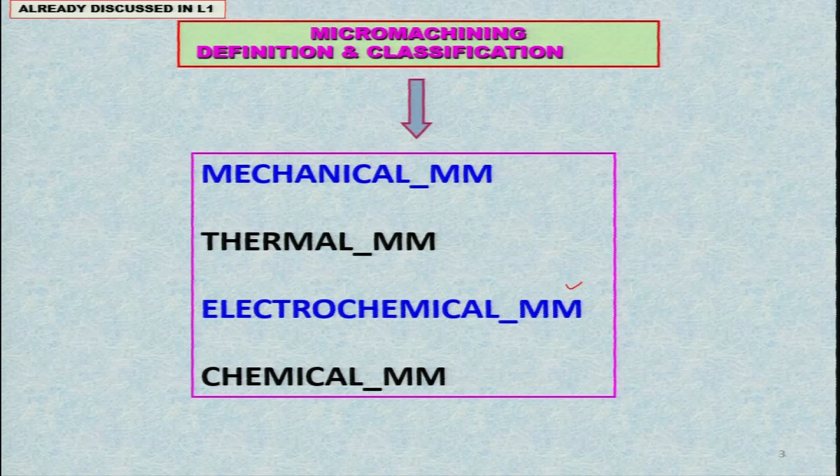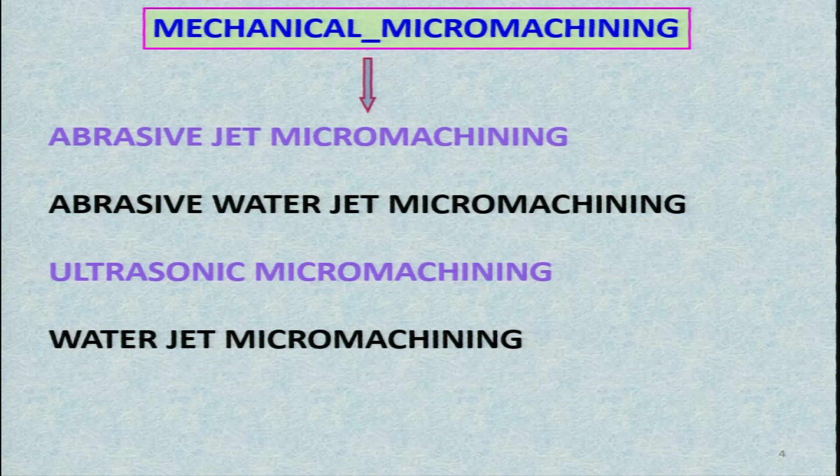If you recollect, we further classified mechanical type of micromachining processes as abrasive jet micromachining, abrasive water jet micromachining, ultrasonic micromachining and water jet micromachining processes. These are the advanced mechanical micromachining processes.

Now, traditional micromachining processes are given again here as micro turning, micro milling, micro drilling, etc. And then these are the total advanced micromachining processes, which includes thermal, mechanical, electrochemical and chemical type.

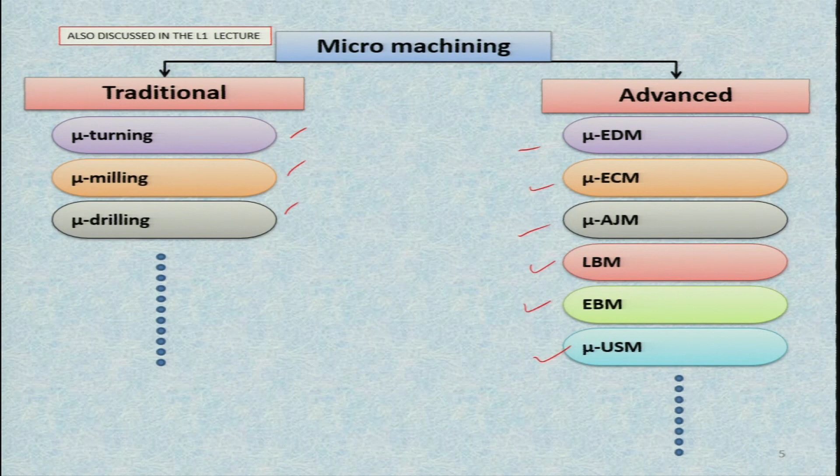I just repeat them as micro EDM, micro ECM, micro AJM, micro LBM or LBM as such, and micro EBM, and micro ultrasonic machining and so on. There are a large number of advanced micromachining processes. Some of them we will discuss later on in detail.

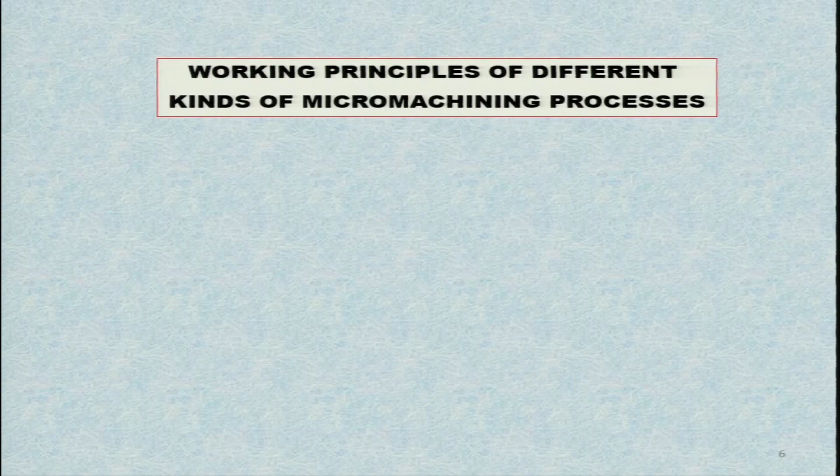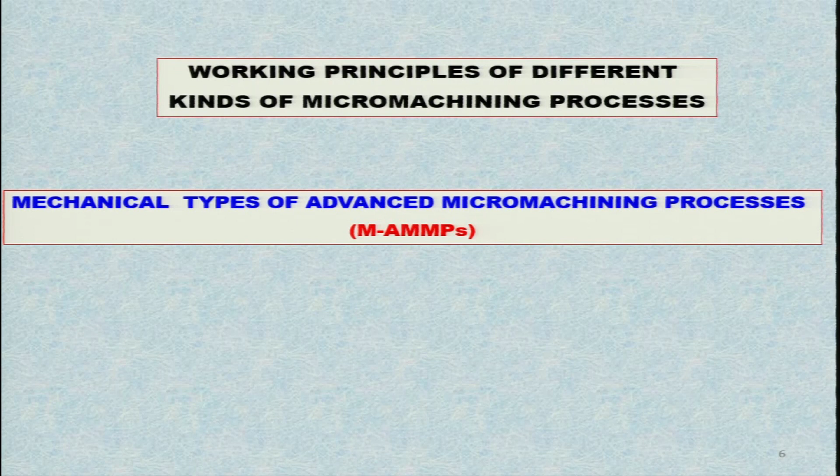Now, in this lecture, I am going to talk about the working principles of different kinds of micromachining processes overall, which includes all three types: mechanical, thermal, and electrochemical and chemical type. First we will discuss mechanical types of advanced micromachining processes, especially the working principle and some applications. Now, principle of advanced mechanical micromachining processes.

What is the mechanism of working of these processes? I will take them up one by one. As you can see here, this is the schematic diagram of the setup for abrasive water jet machining process.

You can clearly see here there is an inlet for the water coming in. It comes at very high velocity, we will discuss it later, and then there is a jewel through which it is coming out, and from this particular end, abrasives are being fed into the jet of water over here, and this is known as the mixing tube.

In this mixing tube, water and abrasive particles get mixed up, and this moves downward, and here is the jet coming out of the mixing tube. This jet consists of water as well as very fine abrasive particles, which may be of micro or nano size, and the velocity of these abrasive particles is as high as 800 to 900 meters per second.

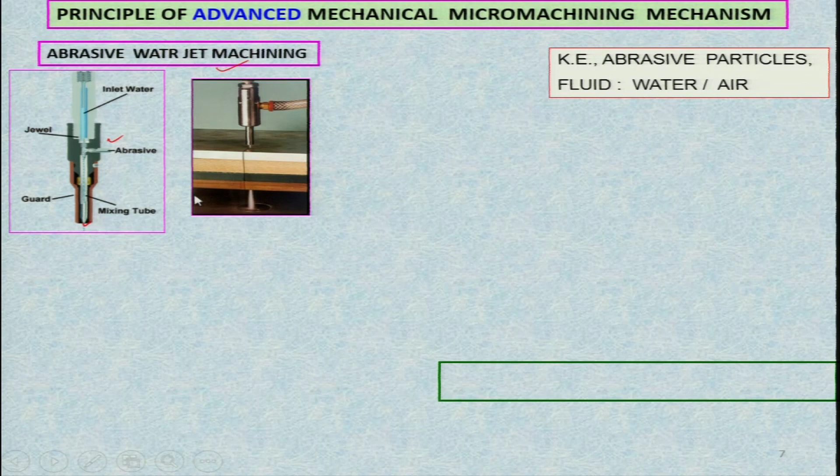So you can calculate the kinetic energy of each particle moving at such a high velocity. Now, this is the real life application of abrasive water jet cutting. You can see the jet coming from there, cutting the plate being cut over here, and here is the jet coming out after cutting this particular workpiece or plate, clearly visible over here.

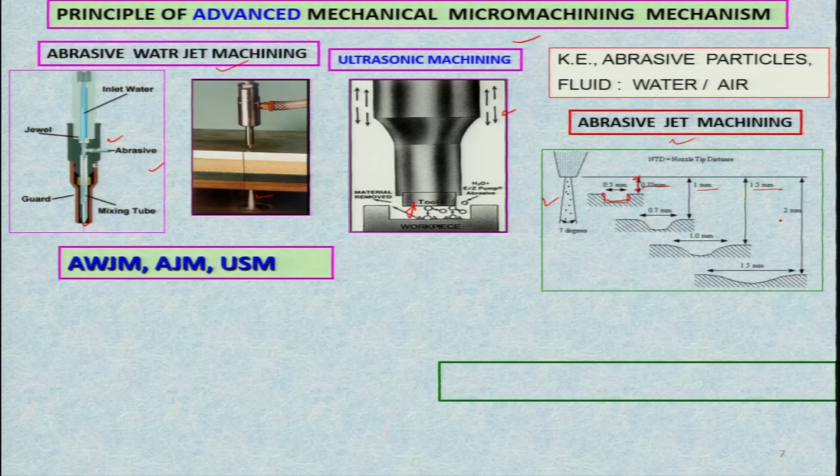This cavity size and shape depends upon the gap maintained between the bottom tip of the nozzle and the surface being machined. As you can see here, this is the initial gap between the bottom of the nozzle and the top surface of the workpiece. After machining, this is the shape produced. Depending upon this gap, the features of the cavity being formed change. In these different cases, the size or width of the cavity continuously increases as you increase the gap from 0.75 millimeter to 1 millimeter to 1.5 millimeter and 2 millimeter. This also decides the accuracy you are going to get.

Now, the question is how material is removed in these three mechanical types of advanced micro machining methods. We have two kinds of material: ductile material and brittle material. The mechanism of material removal in both these materials is different, regardless of whether it is abrasive water jet machining, ultrasonic machining, or abrasive jet machining.

You can see here in this figure, if the abrasive particle hits the workpiece surface at a certain angle, not 90 degrees but less than 90 degrees, and the workpiece material is ductile, then two forces are acting. One is the normal force, Fy, responsible for the penetration of the abrasive particle inside the workpiece, and there is another force, Fx, responsible for removal of material in the form of micro nano chips. It is the shearing force which shears the workpiece material and removes the chip in the form of small materials from the workpiece.

If it is a brittle material, the mechanism is slightly different. Here, as the abrasive particle hits the workpiece, being a brittle material, initially micro cracks initiate and spread all over the affected area. You have lateral cracks and a little bit of plastic zone, and the cracks keep expanding, and finally the material is removed in the form of micro nano chips from the workpiece. So, the two mechanisms, one for ductile material and another for brittle material, are quite different from each other.

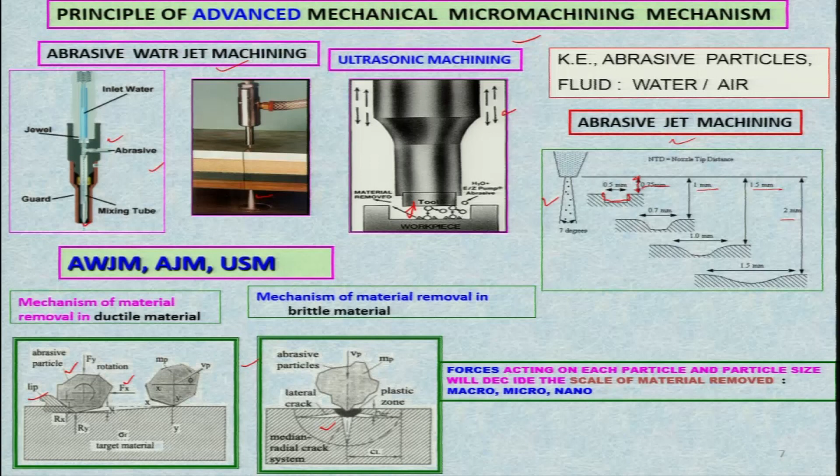Now let us discuss a bit more detail of these processes, that is, the abrasive jet machining process. As you can see here, this is the abrasive jet machining process, this is the nozzle, and different kinds of features are being created on the plate with the help of this process. You can see this hole is created, and different features are being created with this particular process.

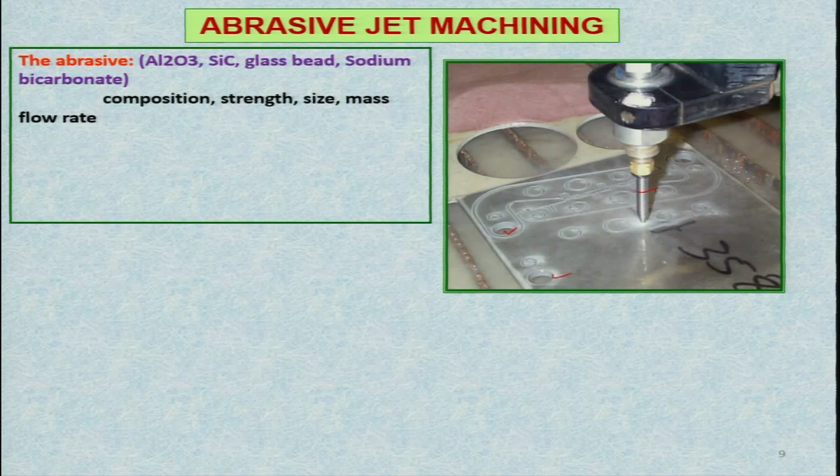The abrasives normally used are alumina (Al2O3), silicon carbide, glass beads, and sodium bicarbonate. Which abrasive to use depends on which workpiece material you are going to machine. The abrasive particle hardness should always be much greater than the workpiece material hardness, which makes a difference in the accuracy and material removal rate you get. So composition, strength, size, mass flow rate, etc. of the abrasive particle decides the process performance.

As far as the carrier is concerned, in abrasive water jet cutting, as I mentioned earlier, you use water as the carrier. But in abrasive jet machining, you normally use air, nitrogen, or CO2 gas as the carrier.

Their composition, pressure and velocity also affect the performance of the process, because pressure or the velocity of each abrasive particle will decide kinetic energy, and kinetic energy will decide how deep it can penetrate inside the workpiece and remove the material. In case of ultrasonic machining, it is the pressure with which the horn or the tool is hitting the abrasive particles, which will decide the kinetic energy again of that particular particle and the material removal rate.

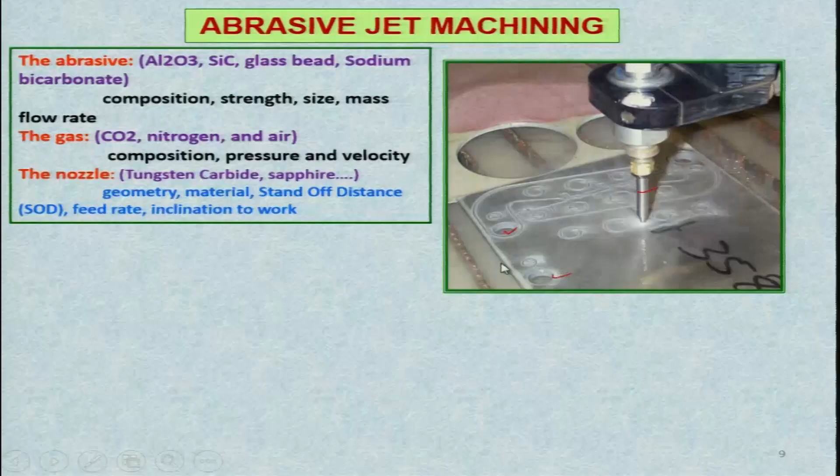Now, stand-off distance, as I have mentioned to you earlier, is the distance between the bottom of the nozzle and the surface of the workpiece which is being machined. And as we have seen in case of AJM, I have told you and shown you, it has a big effect on the shape and size of the cavity being machined.

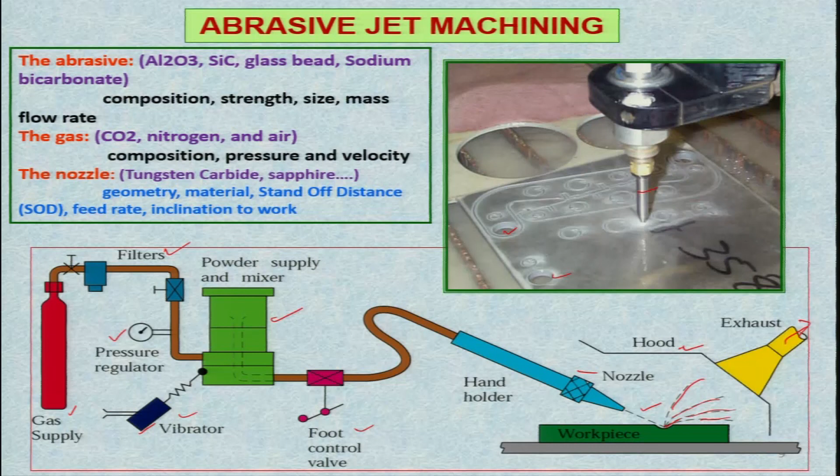And after hitting the workpiece surface, these abrasive particles bounce back and go away from the cavity being machined. It does not go and hit the other machines or other persons working over there. You have the hood over here, so that it will stop them, and whatever air or gas you want to exhaust outside the machining room or machining chamber, this will go out from here.

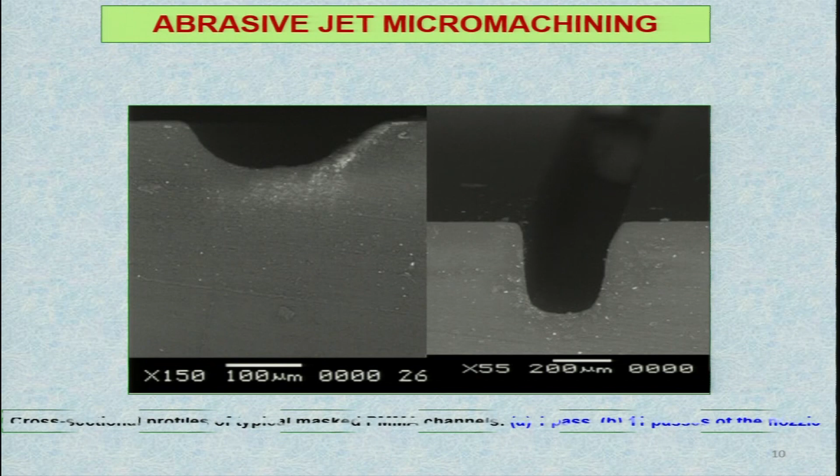Now, you have the abrasive jet micro machining applications. As you can clearly see here, the cross sectional view of the machined surface, cavity over here. This is the shape and size of the cavity after one pass of machining.

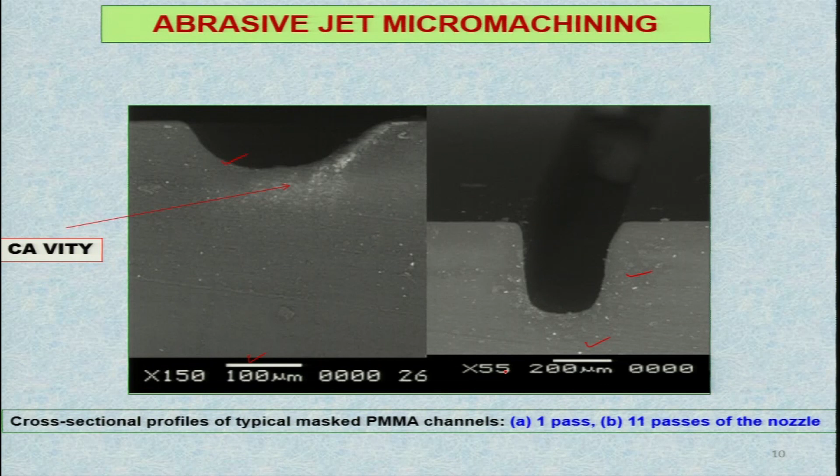Now, if we continue, you can see the magnification here, this is 150 times magnification over here, and if you see this, it is the cavity you are getting after 11 passes, and you can clearly see the difference between the two. The magnification over here is 200 micrometer, this particular length. As you can see, it is 55 times, it is 150 times.

Now, another process which can be used for micro cutting or cutting both is the water jet machining process or water jet micro machining process. The principle remains the same. Here the kinetic energy of water is used to remove the material. Definitely it is not used for cutting very hard material.

Initially water jet machining was developed for cutting in the coal mines in Japan, because so many accidents were taking place by fire in the coal mines, and keeping that in view, water jet cutting process was developed, so that fire does not take place in the coal mines.

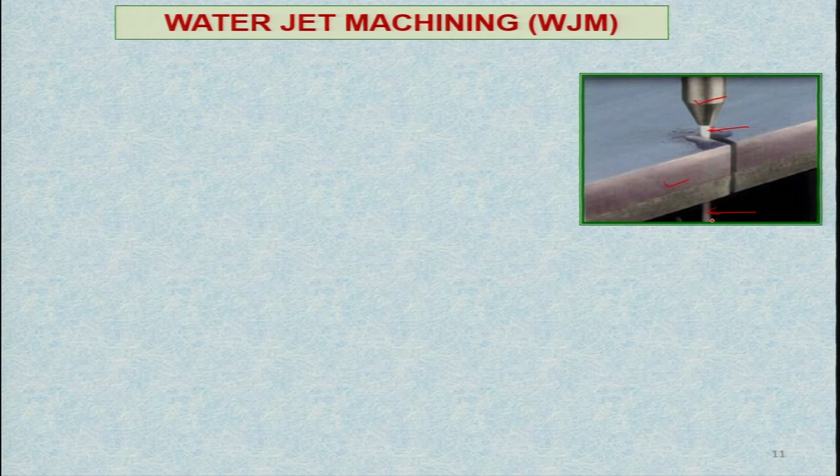Now, you can clearly see this is the nozzle, and here is the jet of water, and this is the plate being cut, and this is the exiting jet of water, and you can get very good shape and size by cutting it. Now, if you convert this, or if you have the size of the nozzle or the inner diameter of the nozzle in microns, few hundred microns, then the cut or the feature that you are going to create will come in the category of micron size features or micro machining.

These are the different elements of the water jet machining setup. Fluid supply is there, and it is having the filter.

Then you have the pump, with the help of which you achieve a certain pressure of the water when it is supplied through the nozzle, and this water pressure is quite high. You have the intensifier to increase that particular pressure, and the accumulator is there where you collect the water. Then you have the control, with the help of which you can control the pressure or other quantity of the water that you are going to supply to the valve, and then you have the sapphire nozzle.

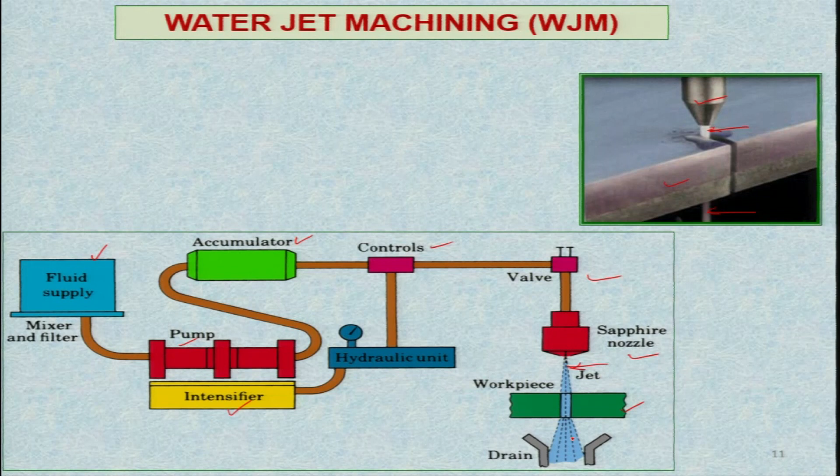This is the jet of water which is coming out at very high velocity, and it is the workpiece being machined with the help of this particular water jet. When it comes out, it should be drained at a safe place, because it is to be recycled again and again and used, hence you have the drain over here. So you can again see the water jet there.

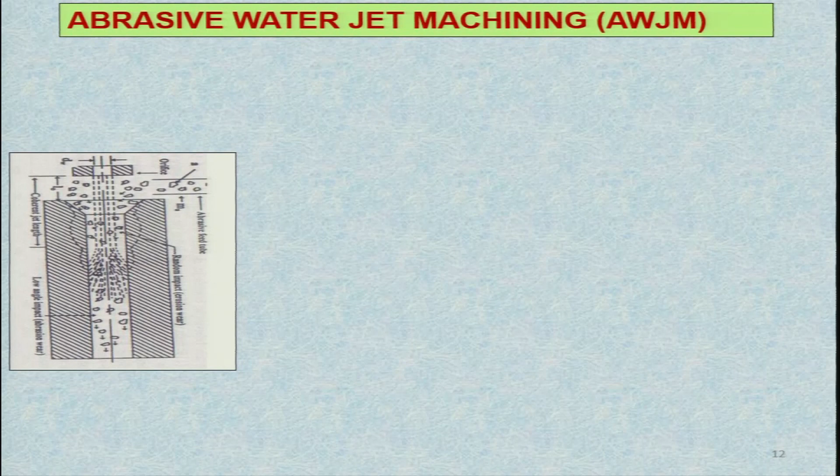Now you have another very useful process known as abrasive water jet machining. It is a modified version of water jet cutting, because water jet cutting has certain limitations - it cannot machine very hard materials and very thick materials. So researchers and scientists mixed abrasive particles with the water jet, so that the kinetic energy of the abrasive particle is used for cutting. Now you can machine all kinds of materials, including very hard materials, with this particular process.

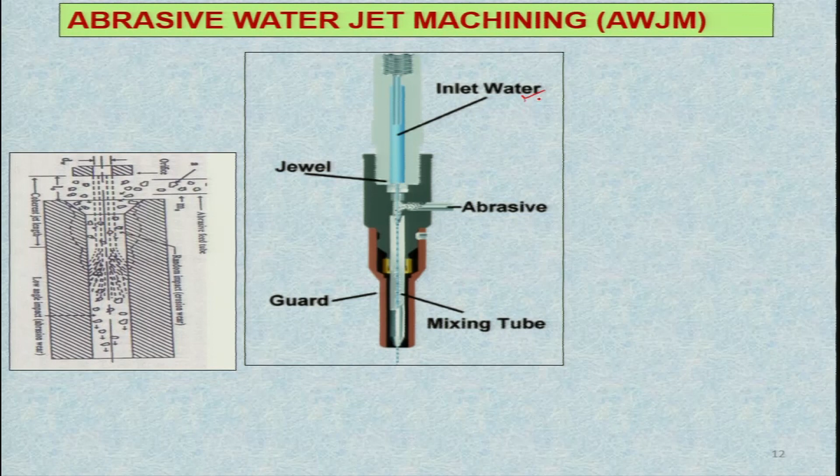This is the same setup, the schematic diagram of the abrasive water jet cutting which I showed you in the earlier slide. Inlet water is there, abrasive inlet is there, mixing tube is there, and jewel of the nozzle is there. Now you can see the similar kind of things - the jet is coming out after cutting this particular composite plate, and this is the nozzle, and this is for abrasive particles going into the mixing chamber.

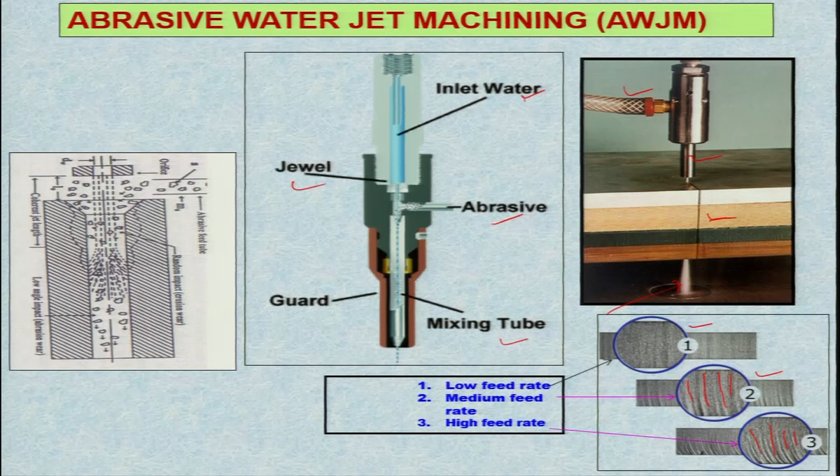Now you can see clearly here an important thing: if you have a low feed rate, then you can get a good surface on the machined or cut surfaces, with good characteristics. If you have a medium feed rate, then you can get hashing or lining over there, because feed rate is indicated here. If it is a very high feed rate, then the surface obtained is quite rough, as you can see over here. So one has to decide carefully what kind of surface they need, and accordingly decide the feed rate with which they are feeding.

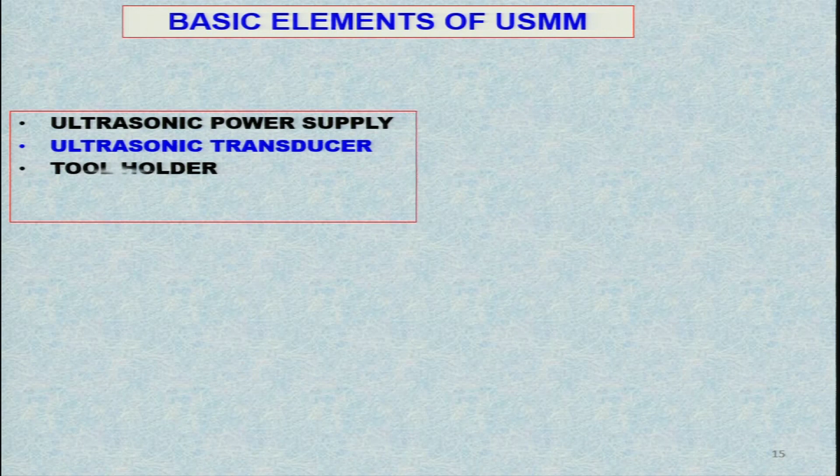Here very hard workpiece material can be machined, and complicated cavities can be produced on very hard workpiece materials. This is the beauty of this particular process. The constraint, or requirement, is that whatever complicated shapes and sizes you want to produce on the workpiece, you should first be able to produce it with high accuracy on the tool - then only it can be replicated.

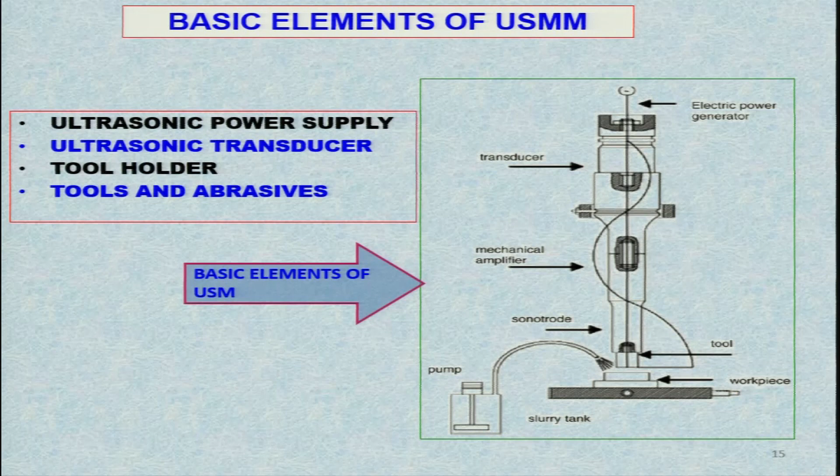What are some applications of ultrasonic micromachining? You can use it for drilling micro holes. The amplitude of vibration in this particular case is 5 microns. Workpiece material is silicon, which is very hard. Tool material is tungsten, and the tool size varies from 50 micron, 100 micron, 150 micron, depending upon the size of the hole that you want to make.

And then you have the abrasive grain type - you can use different kinds of grains. The requirement is that the grain should be much harder than the workpiece material hardness, otherwise it will not work. So in this particular case, they have used polycrystalline diamond powder as the abrasive particles.

You can use other abrasive particles also, as I mentioned earlier: alumina, silicon carbide, tungsten carbide, etc., depending upon the hardness of the workpiece. The size of the abrasive particle, 1 to 3 micrometer, controls the accuracy and the surface finish you are going to get on the machined surfaces.

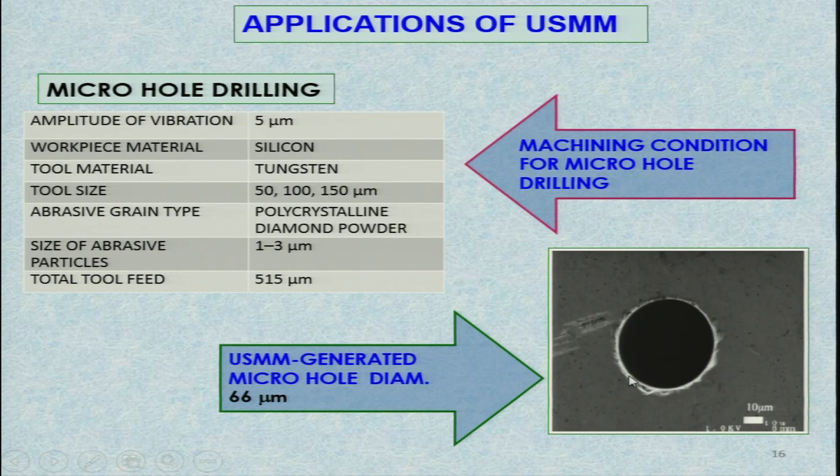Total tool feed is 515 micrometer, depending upon the depth you want to achieve of the hole or cavity being machined. The ultrasonic micromachining generated micro hole diameter is 66 micrometer. You can see over here, this is the scale of 10, and you can see the nice surface of the hole produced.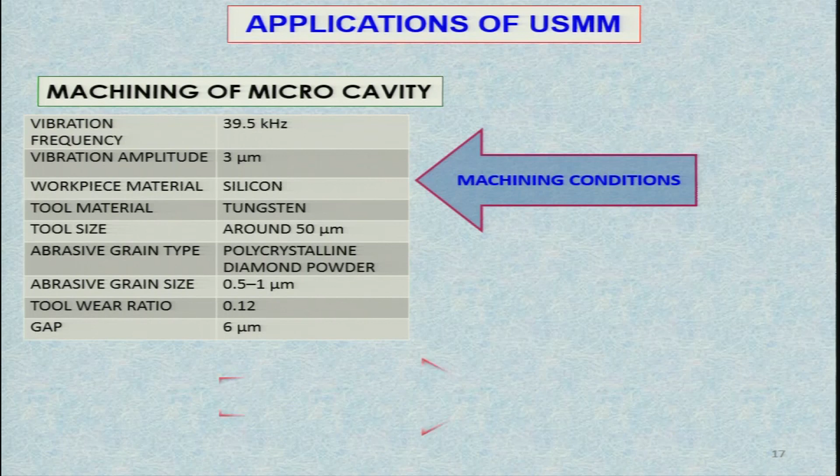You can also use it for creating a cavity other than a hole, as you can see over here. This is a very good square cavity with a kind of non-circular pillar. This has been produced with the help of the ultrasonic micromachining process, and you can see the dimensions are very, very small, because the scale given is 100 micrometer, so you can calculate the size of this particular cavity. Here are the machining conditions given. The important thing is the gap between the workpiece surface and the bottom of the tool is 6 micron.

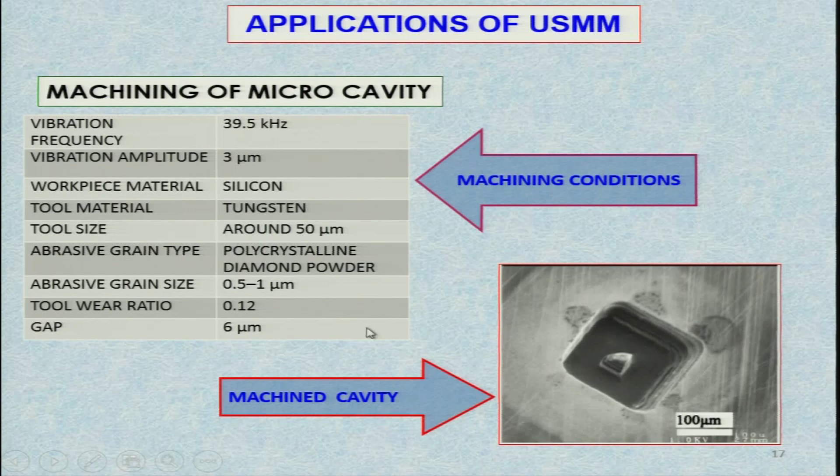Now, merits of ultrasonic micromachining: you can machine any material regardless of their electrical, thermal, magnetic conductivity or other physical properties. As we can see, ultrasonic micromachining applies to machining semiconductors also, such as silicon, germanium, etc.

Ultrasonic micromachining is suitable for precise machining of brittle materials, and it can drill circular or non-circular holes in any or every hard material, or very hard materials—both are correct. We have seen one non-circular hole also in the earlier slide, which was a square hole, and there is less stress because of its non-thermal characteristics.

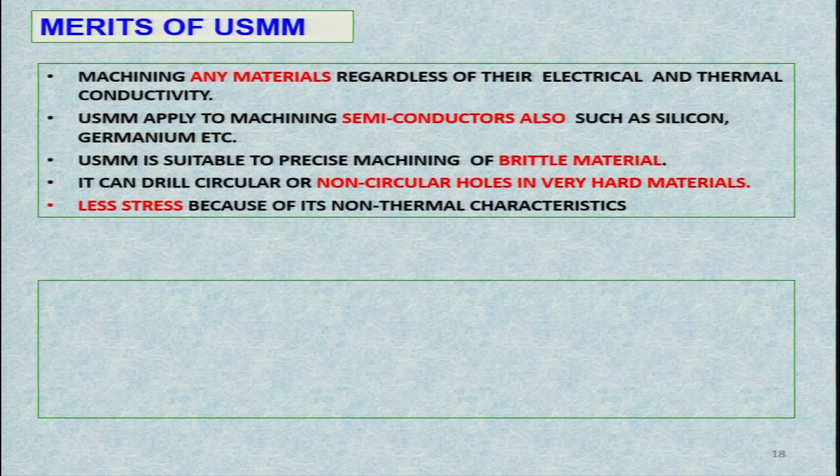Now, what are the demerits of the ultrasonic micromachining process? Ultrasonic micromachining has low material removal rate as compared to other advanced micromachining processes, and the tool wears fast in ultrasonic micromachining because the tool is directly hitting the abrasive particles.

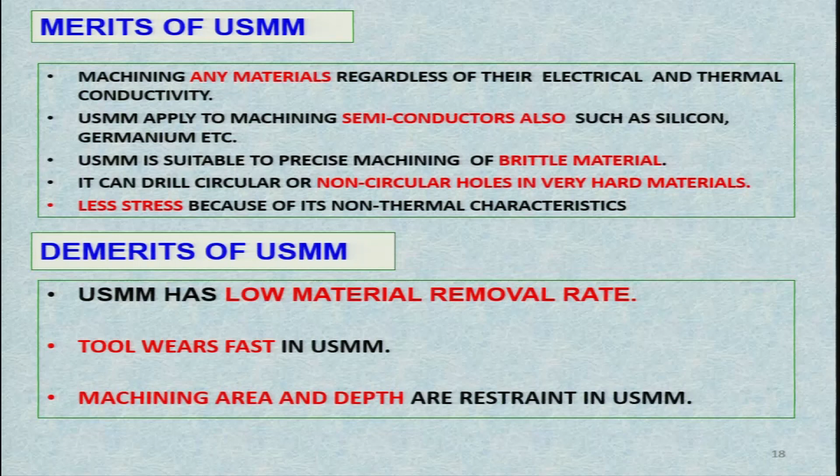So it is in direct contact with the abrasive particles, applying the force, so it also wears out continuously. Machining area and depth are restrained in ultrasonic micromachining, because this is normally used for small sizes and shapes being machined on small workpieces rather than very large workpieces or very large features or cavities being machined.

Now, another class of advanced micromachining is the thermal advanced micromachining processes. In the mechanical type of advanced micromachining processes, material removal was due to mechanical forces, as we have seen in all the cases—does not matter whether it is water jet machining, abrasive water jet machining, abrasive jet machining or ultrasonic micromachining. But this may not work well all the time.

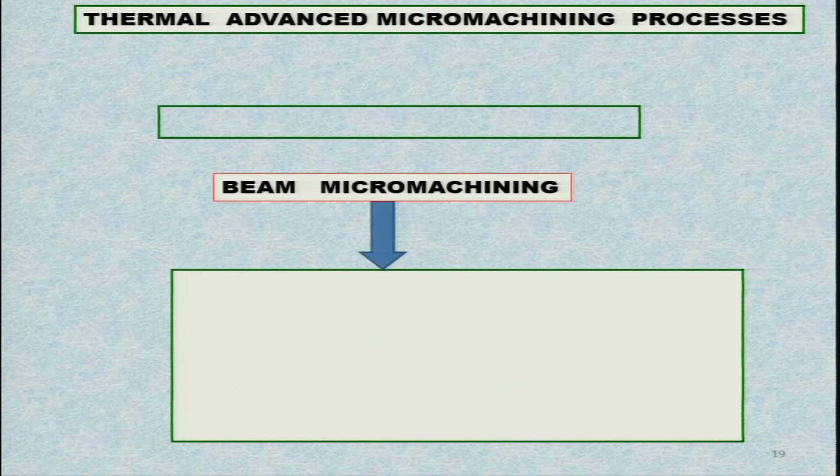So scientists evolved thermal advanced micromachining processes, where the basic principle is that the workpiece material is heated, melted, and part of it may get evaporated, and then the molten material is thrown out or removed from the cavity. Let us see the basic principle of these thermal advanced micromachining processes. First, let us take electrical discharge micromachining processes, and second is beam micromachining processes, which includes laser beam micromachining and electron beam micromachining, and third is ion beam micromachining.

Ion beam micromachining is normally put in the thermal micromachining processes category. However, personally I do not agree with this, because in this particular case there is hardly any heat generation, melting and vaporization of the workpiece. Hence, it would have been more correct to put it in the mechanical type of advanced micromachining processes, but as the practice is there, I have also kept it in the thermal advanced micromachining processes group.

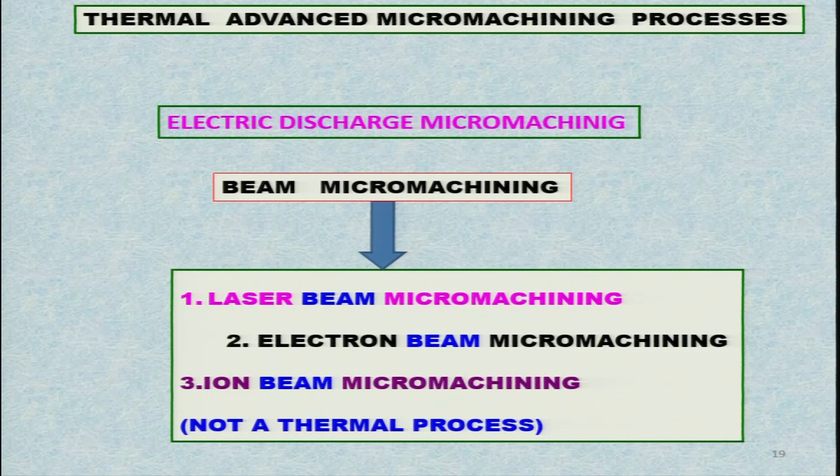So let us see the different types of beam micromachining processes and their working principle. Ion beam machining process: here is the liquid metal source from which ions are detached, and here is the extractor, and you have the lens, and the ions are coming out and moving through the aperture. Depending upon the size of the aperture, the size of the ion beam is governed, and you have the deflector plate.

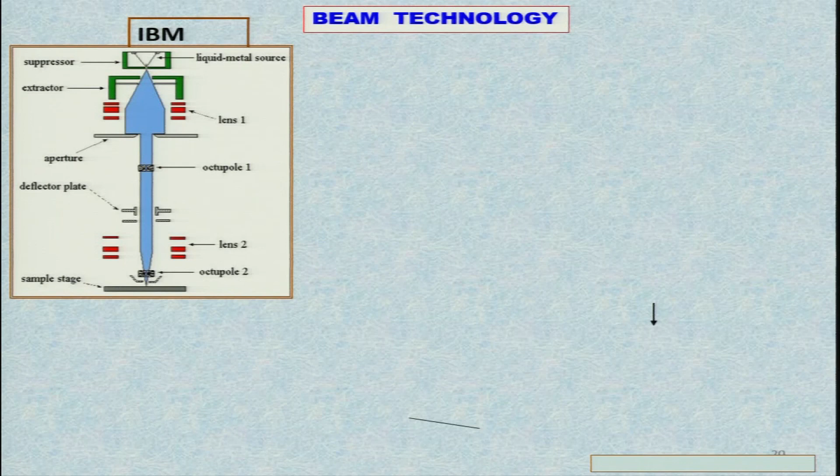This plate moves the ion beam either on the left side or the right side for exactly locating the beam on the workpiece surface. Then you have the lenses which concentrate this particular beam, and the beam comes and hits the workpiece surface. Depending upon the size of the beam, you can cut the material feature on the materials, and this particular process is normally used for nanomachining, but micro features also can be machined with the help of this process.

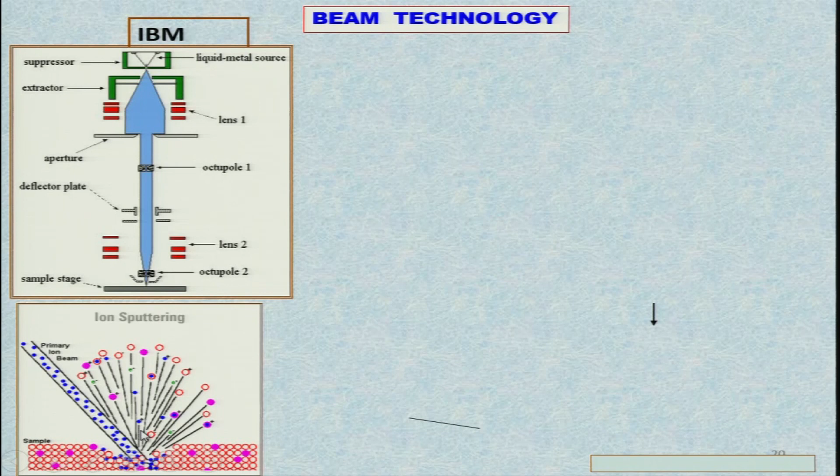So it has much larger energy than the bonding strength between the two atoms, and one ion is able to remove more than one atom from the workpiece surface, and they are thrown out from the sample or workpiece surface, as you can see here. Depending upon the energy contained in each ion, the number of atoms thrown out from the workpiece surface is decided.

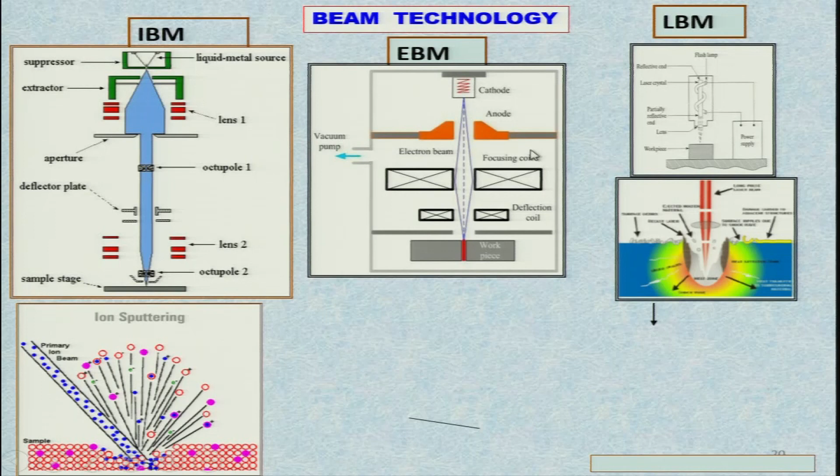Now the third very important process is known as laser beam micromachining, and laser light is used for melting and vaporization of the workpiece material. Here you can see a long pulse laser beam is being used. This is the laser beam, it is hitting the workpiece.

When you are using the long pulse laser beam, many kinds of defects are created in the machined cavity, as you can see over here. These are the debris etc. being formed, this is a recast layer, and so many other defects are there.

We will discuss them in detail when we are discussing laser beam micromachining, but where you want very high accuracy, in those cases you can use short laser pulse micromachining. You can see clearly here, this is the cavity being machined and here this is the cavity being machined. So you can see different kinds of defects created over here, while with short laser pulses there are hardly any defects created in the machined cavity.

Now this is short pulse laser machining. Now a very commonly used process, known as electric discharge machining process, and this process is being used even in small scale industries and medium scale industries. Definitely it is used in large scale industries also, and the working principle is very simple.

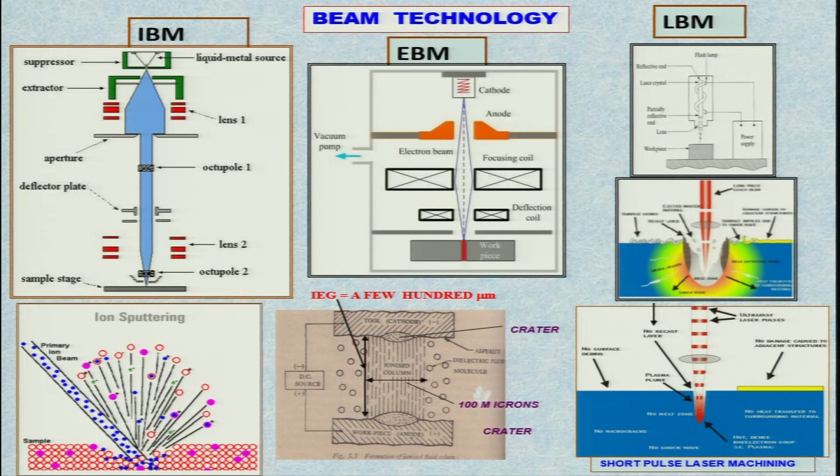We will discuss all these things in detail. The column is normally of 100 microns, but this depends upon what dielectric is being used, what is the breakdown voltage, and so on.

Now, let us see more details about electric discharge micromachining process, the basics of EDMM, that is electrical discharge micromachining process.

In EDM, material is removed by thermal erosive action through electrical discharges, mainly sparks, not really an arc. If you want good surface finish and accuracy, it should be a spark, and discharges should be avoided as far as possible. Otherwise it may lead to an arc, and if arc is there, the workpiece may get damaged.

This is provided by the use of a pulse generator; here you are using pulse current rather than continuous current.

The same principle of EDM is applied to remove material at micro level for micromachining. In this case, when we talk of micromachining, the size of the tool is in the micron range rather than macro range, and that is how you get micromachining in the EDM process.

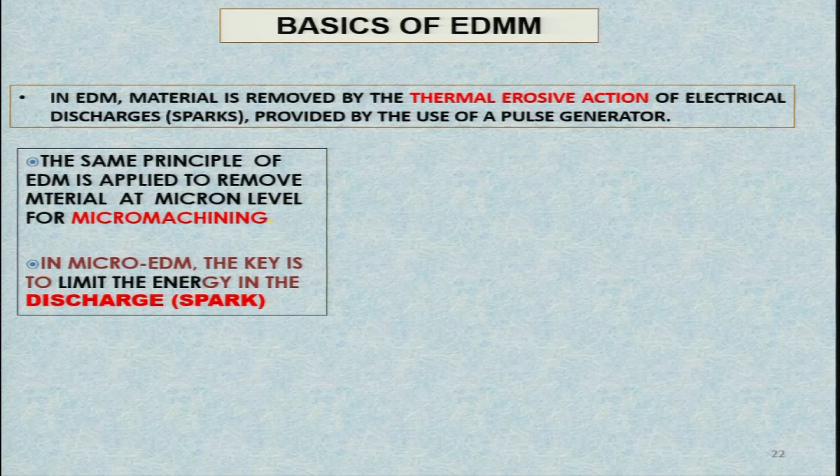In micro EDM, the key is to limit the energy in the discharge or spark, because depending upon the spark energy, the amount of material removed from the workpiece is decided or controlled. Hence, spark energy is to be controlled, especially in case of micro EDM process.

The dielectric fluid normally used earlier was kerosene. Nowadays, manufacturers of EDM machines supply their own dielectric fluid, and most of them do not reveal the composition of this dielectric fluid.

However, nowadays deionized water is also used as a dielectric fluid. We will discuss this while we discuss the electric discharge micromachining process.

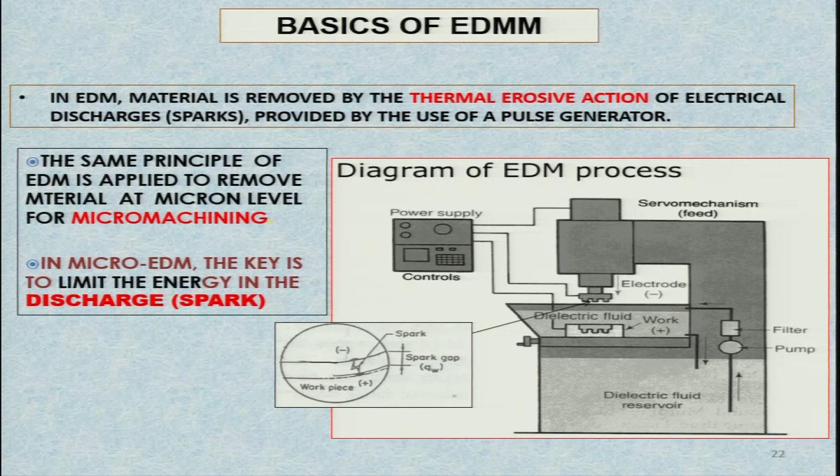You can see clearly here is the cathode and here is the anode, and between the two, spark is taking place. Depending upon the gap between cathode and anode, that gap is known as the inter-electrode gap. The intensity of the spark is also decided depending upon the gap.

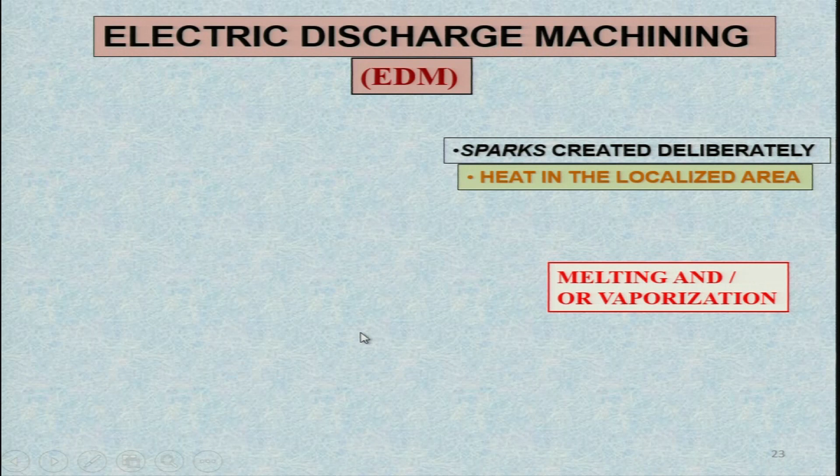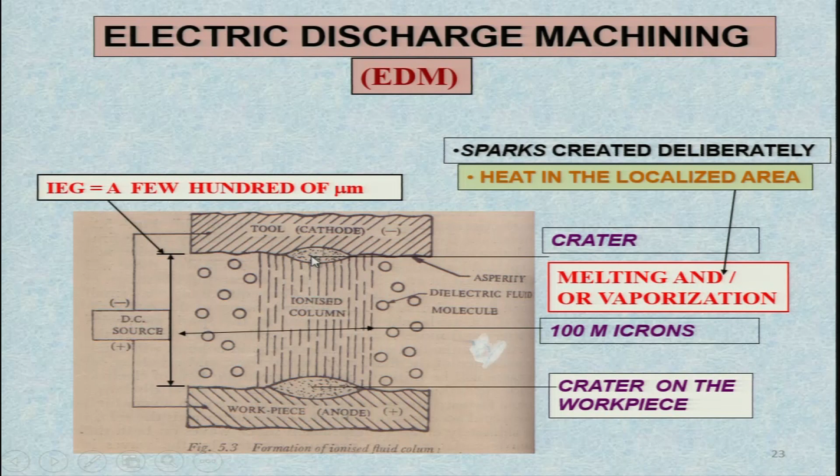And you can see the melting and/or vaporization, because of which you have the crater formed.

Now, input parameters to the micro EDM process are voltage, capacitance is controlled, layer depth is decided by what the input parameters are, including the feed rate.

Now, you have the micro EDM machine, and output is normally the material removal rate, but as I mentioned earlier, the tool is also wearing, so electrode wear rate is also there, which is quite important to understand.

Otherwise, if the tool gets deformed or reshaped, you are not going to get the correct cavity on the workpiece surface, and you have to control the gap, that is the inter-electrode gap also, to get the correct cavity on the workpiece, and that is the output.

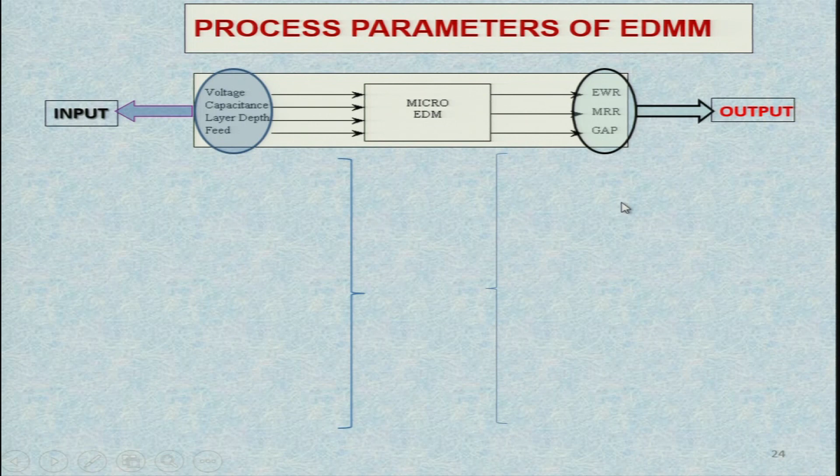So you can see here electrode wear rate versus capacitance, and as capacitance is decreasing, electrode wear rate is increasing to a certain extent, say up to 100 picofarad, and then it starts decreasing again. Then you can see the material removal rate: as capacitance is decreasing, material removal rate is also decreasing.

Now here you can see layer depth is in terms of microns, and here is the material removal rate. You can see for different picofarads as the capacitance, the performance of the EDMM process is different.

For slot machining, again you have different voltages. As the voltage increases up to say 100 volts, you get higher material removal rate, but somehow at 80 volts the material removal rate is lower at certain feed rates, and then it starts increasing. So what are the scientific reasons for all these things? We will discuss this when we cover EDMM in detail.

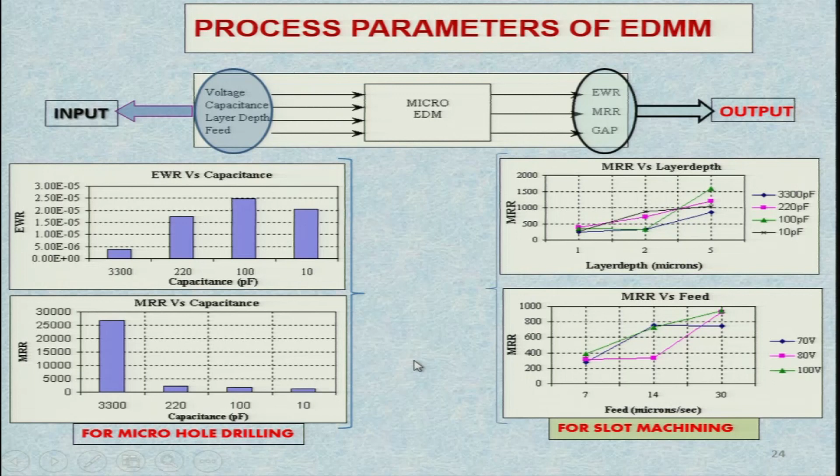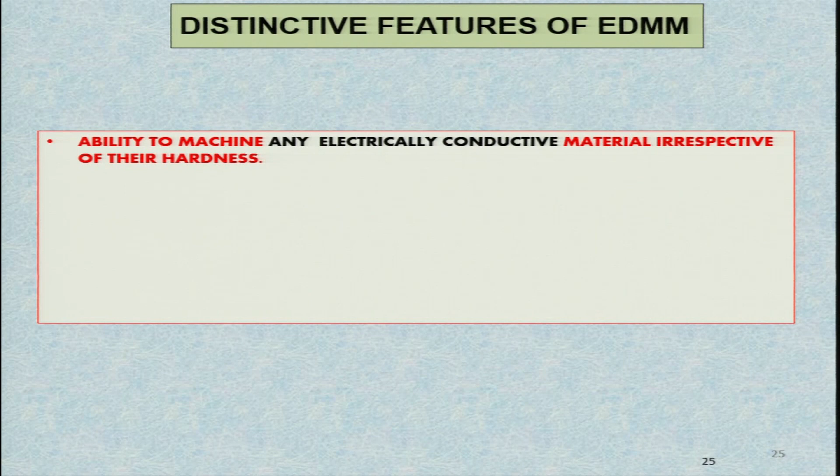Now, a distinguishing feature of the electric discharge micromachining process is that it is able to machine any electrically conductive material irrespective of its hardness, because in mechanical type advanced micromachining processes, it is the hardness of the workpiece which controls the performance of the process. That is why scientists had to find alternative processes whose performance is independent of the mechanical and physical properties of the workpiece, and EDMM was one of them.

Machining can also be done without applying pressure on the material. No mechanical pressure is applied on the workpiece, allowing high precision on curved surfaces, inclined surfaces, and very thin sheet materials which are difficult to drill or machine. So this process can be used for any kind of complicated surfaces, curved or inclined.

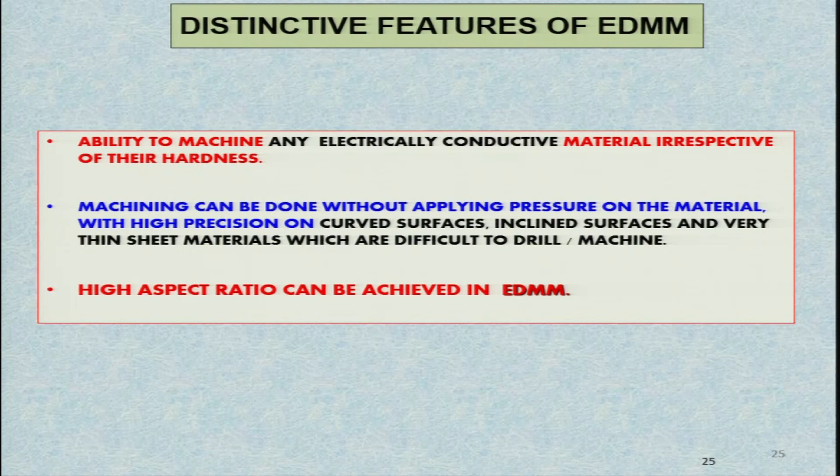However, the performance is also affected by the shape of the surface being machined. We will discuss this later. High aspect ratio can be achieved in electric discharge micromachining processes also, as in case of electric discharge machining.

Let us see some process variables which compare the EDM and EDMM processes. I will not go into detail here, but will just give you an idea. The mechanism of material removal in both cases remains the same, whether EDM or micro EDM. Material removal rate is definitely different; it is much higher in case of EDM, around 3 into 10^5 cubic millimeter per hour, while it is 0.6 to 6 cubic millimeter per hour in micro EDM.

Dimensional accuracy is 15 to 50 micron in case of EDM and 3 to 1 micron in case of micro EDM. Surface finish achieved is 0.2 to 2.5 micrometer in case of EDM, this is the RA value, and in case of micro EDM it is 0.4 to 0.5 micrometer. So you can get a better surface finish in micro EDM compared to EDM.

Power consumption is comparatively low, 2 to 4 kilowatt hours in case of EDM, but it is even lower in micro EDM. For tool material, the basic condition is that it should be electrically conducting, so you can use copper, brass, copper-tungsten alloy, silver-tungsten alloy, graphite, etc. Nowadays people are trying to use graphite more commonly rather than metals as the tool material, but graphite also has its own constraints, which we will discuss in detail later.

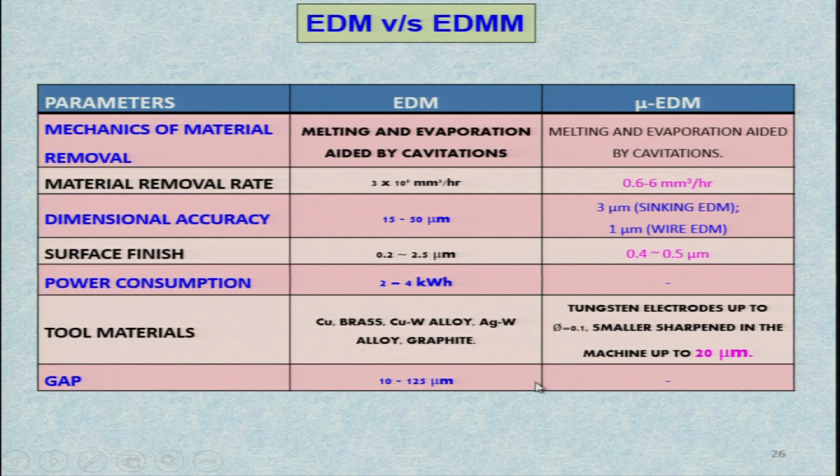Now, comparison of EDMM processes, you can clearly see. I am not going to discuss this in detail here, but micro EDM operations like die sinking and micro wire EDM operations are shown, with features like circular shapes and slots, feature size given in micrometers, different dielectrics like deionized water, the material used, thickness, and machining time in seconds. Depending upon the size of the feature you are creating, the machining time will be controlled, and you can get different material removal rates depending upon the conditions under which you are micromachining.

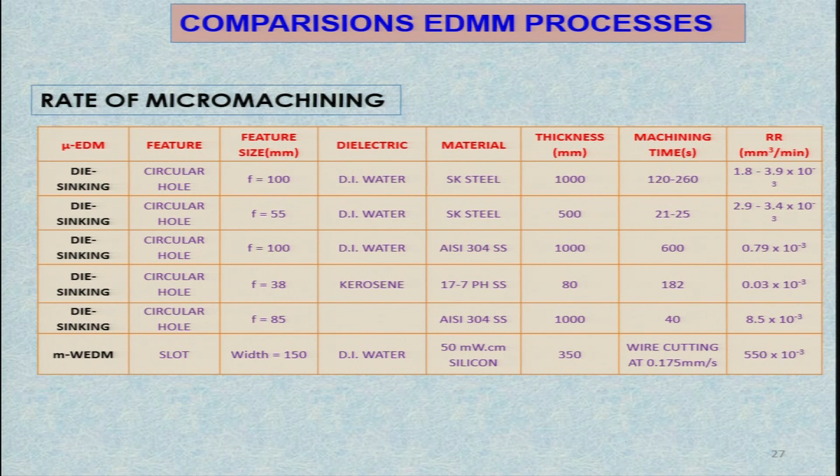Now, power supply in EDMM is simple and rugged. It is very reliable and suitable for higher frequencies, low cost, and competitive for small energy control for micromachining processes.

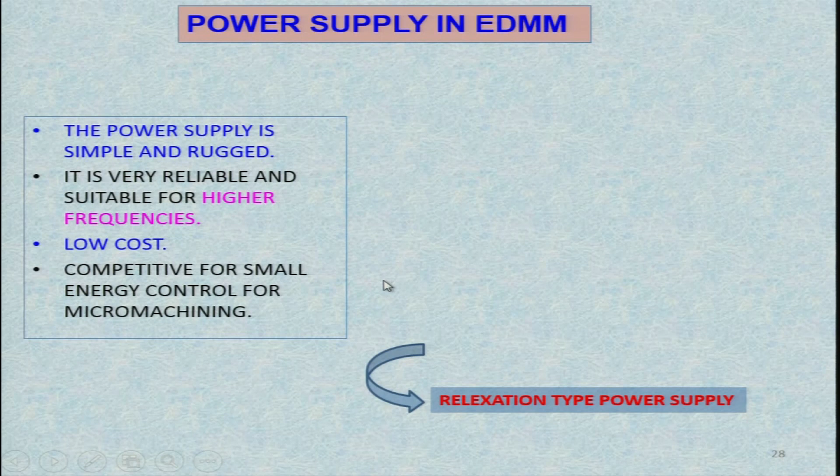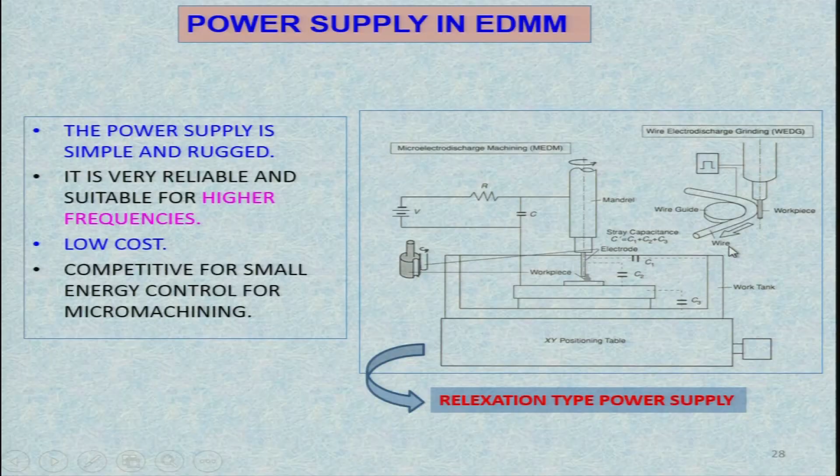In some cases, wire electric discharge grinding process is used to produce very fine electrodes. Here the workpiece is being machined to create a very thin electrode, a few hundred microns or a few tens of microns in size. This is the wire, moving continuously, used to remove material from the workpiece through the EDMM principle of melting and vaporization.

Here are some examples of electric discharge micro machining: a 30 micron shaft and 50 micron holes produced by micro EDM. This is the shaft being produced, with a diameter of around 30 micrometers, and the hole produced is 50 micrometers. Please note that the magnifications here are different from each other, so do not get confused.

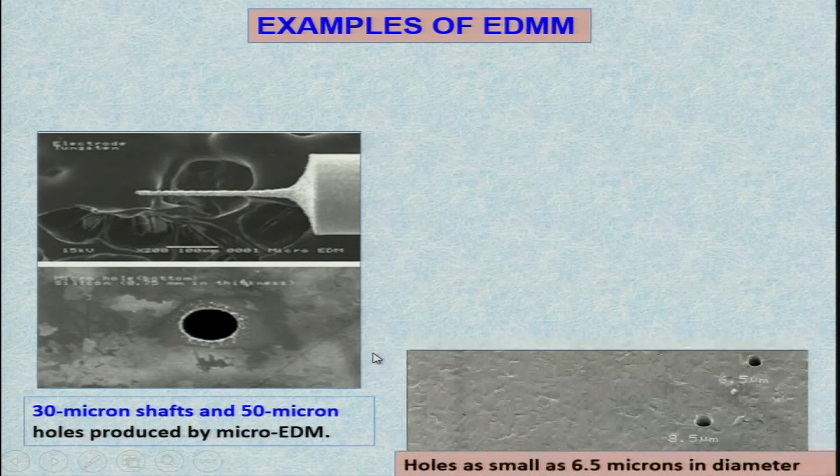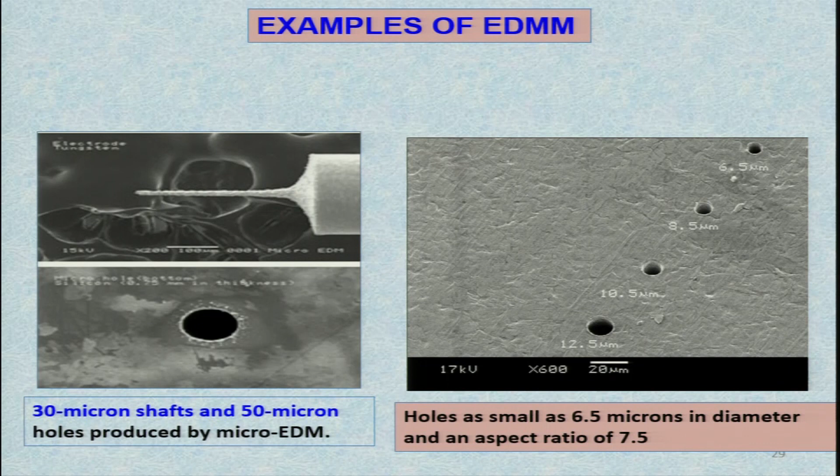Holes as small as 6.5 micrometers in diameter, with an aspect ratio of 7.5, have been produced. This is 6.5 micrometers, this is 8.5 micrometers, 10.5 micrometers, and 12.5 micrometers. You can produce holes of different dimensions and depths depending upon requirements using the electric discharge micro machining process.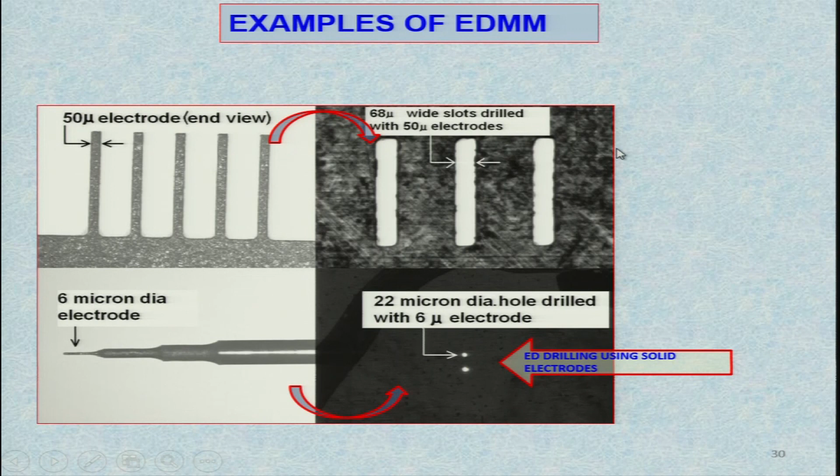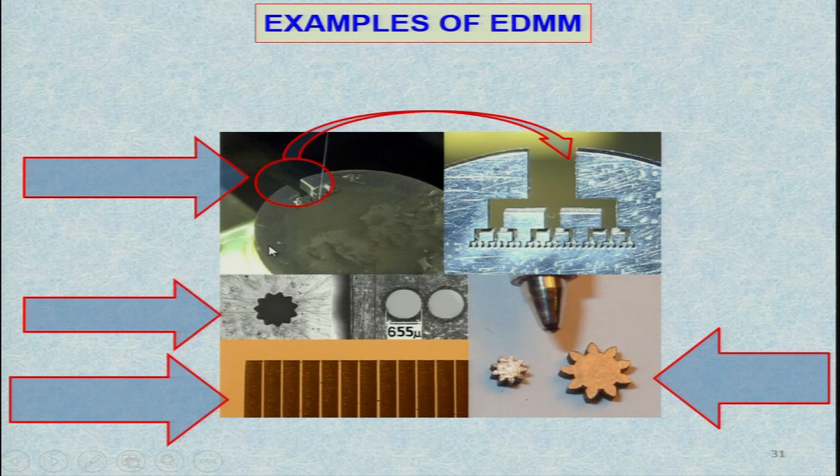Here this is really a micro mixer. This kind of micro mixer has been created so that microfluidics mixing can be done there.

Here is a 0.52 millimeter diameter extrusion die created by the micro EDM process, exactly 520 micron size. You can see a ladder with a 100 micrometer gap between teeth. This ladder has been created so that there is a 100 micrometer gap between the two, one ladder, another ladder, and so on.

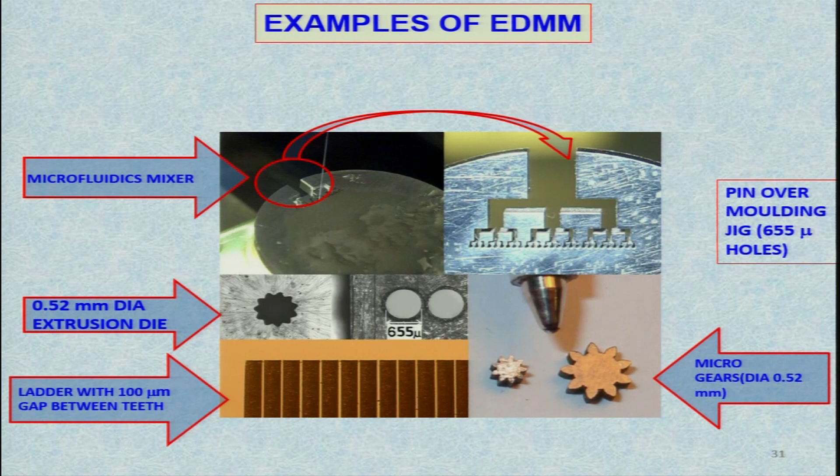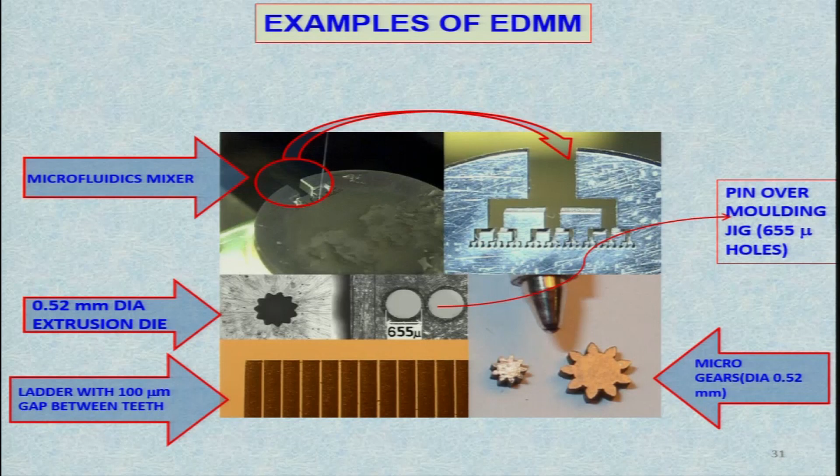These kinds of ladders have been created, and you can see gears, micro gears of 520 micrometers, created here, and a pin of 655 micrometers created with the help of the micro EDM process. So you can appreciate that this particular process can be used for producing micro products, micro devices, and micro components. Some of the examples I have already shown to you.

Now, the electro discharge grinding process is here. This is a hybrid process where scientists have combined electric discharge machining and grinding process to take advantage of both these processes and to get rid of the demerits of both. The question is, why do you need electric discharge grinding?

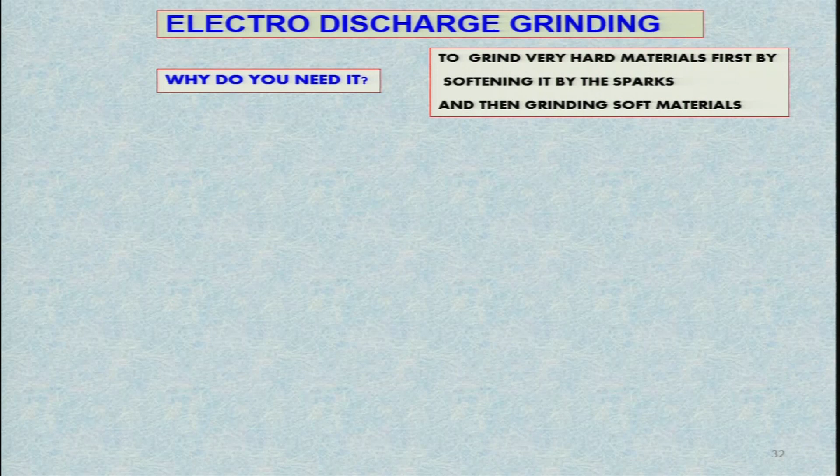Now, to grind very hard materials, first soften it by the sparks produced in the electric discharge grinding process, and then grind the soft material. Once you have the spark, the hard material becomes soft, and if an abrasive particle comes behind the spark, it will remove the material which is softer than the parent material.

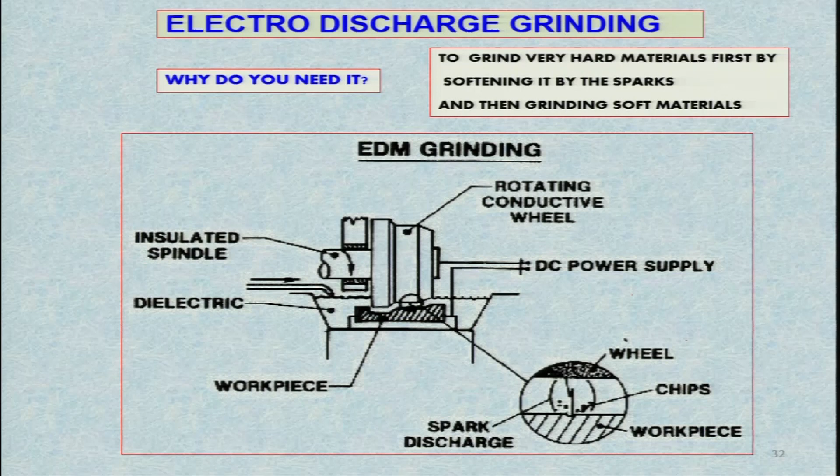So, this is the advantage of this process: you can first make the workpiece material soft and then remove it with the help of abrasive particles. You are really making use of both processes, EDM and grinding, to grind very hard materials which are otherwise difficult to grind. Hence, electric discharge grinding is very useful from that point of view.

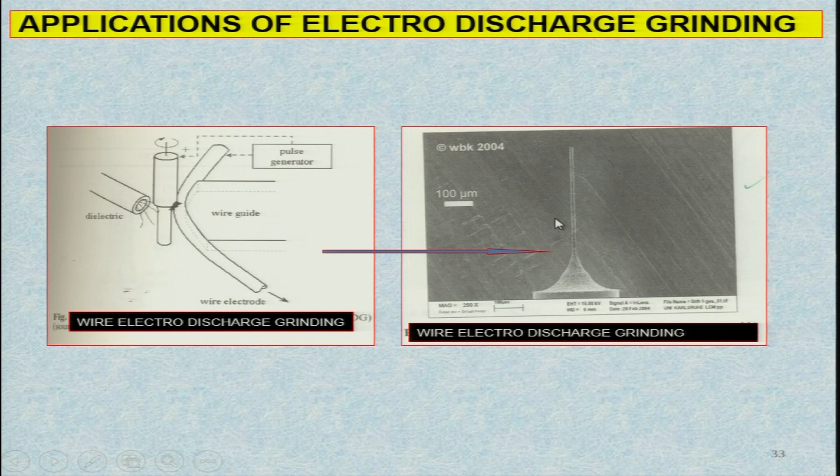Now we will see applications of electro discharge grinding. One application I have already told you is for producing electrodes or very thin wires in terms of tens or hundreds of microns using this process. You can see this kind of wire or pillar produced by this process, which you cannot produce otherwise by EDM alone or grinding alone. Let us take the applications of wire EDM process.

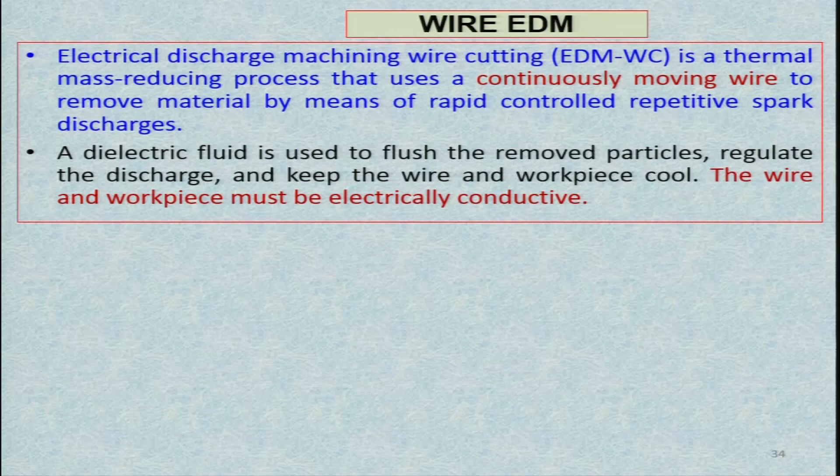Electrical discharge wire cutting is a thermal mass-reducing process that uses a continuously moving wire to remove material by means of rapid, controlled, repetitive spark discharges, as happens in the EDM process also. A dielectric fluid is used to flush out removed particles, since when melting takes place, the molten material solidifies and debris must be removed. These particles are flushed out to regulate the discharge and keep the wire and workpiece cool. These are the basic functions of the dielectric in wire EDM or EDM in general. The wire and workpiece must be electrically conducting; that is the basic requirement.

There is always a gap between the wire and the workpiece surface, known as the inter-electrode gap, which may differ at different locations. Because of sparking, material is removed, and you continuously feed either the workpiece or the wire. If you want to keep the wire stationary, you feed the workpiece in a particular direction, depending on where you want the cutting to take place. This way you can make use of the wire EDM process.